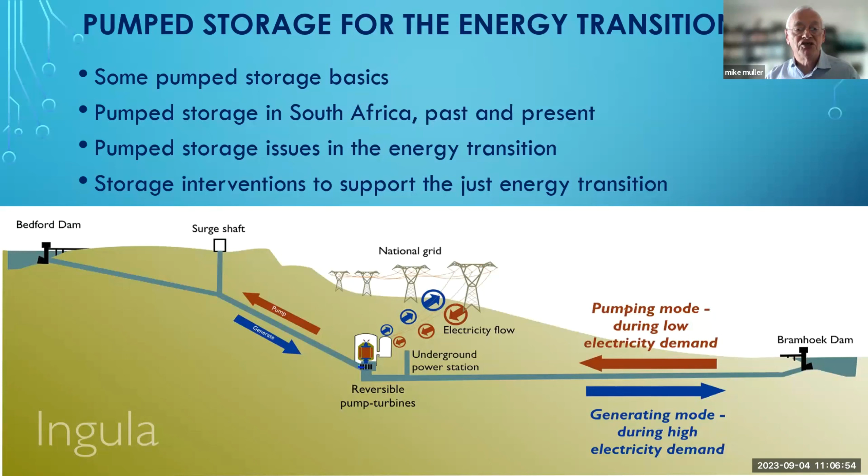4 bullet points for this morning. I'll talk about pumped storage basics. We'll then look at pumped storage in South Africa, past and present, with Mike Shand talking particularly about the Palmiet and Steenbras systems. Then I'll come back and talk about pumped storage in this energy transition and what kind of interventions are needed to support the transition we're going through.

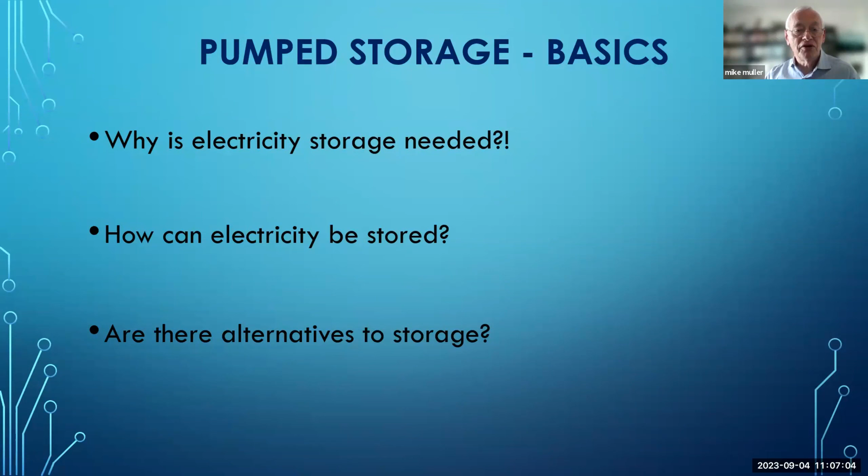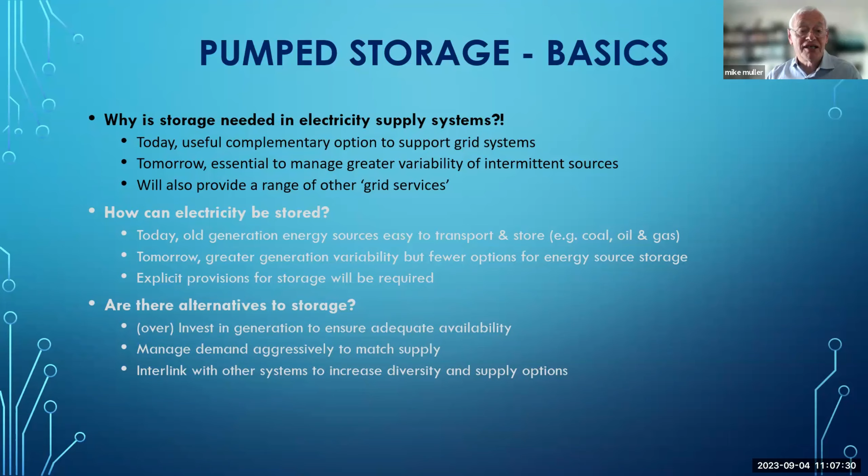So the basics. Why do we need to store electricity? How can it be stored? What are the alternatives? Very quickly, we need storage at the moment as a complementary option. It helps to support grid systems. That's today. Tomorrow, with far more intermittent and non-dispatchable sources, we're going to need it to manage the greater variability of those sources, and we'll depend on it to provide a range of other grid services, which I'll come to. But the basic is clear.

When we don't use much electricity, we use the surplus that comes from whatever generators we have to pump water up a hill. And when we need the power to meet peak demands, we let it out and it runs down and generates for us. Changes with the season, but that's the basic: you use the energy to pump up water when there's a surplus of generation in the system, and when you need extra generation, you let it out and generate power.

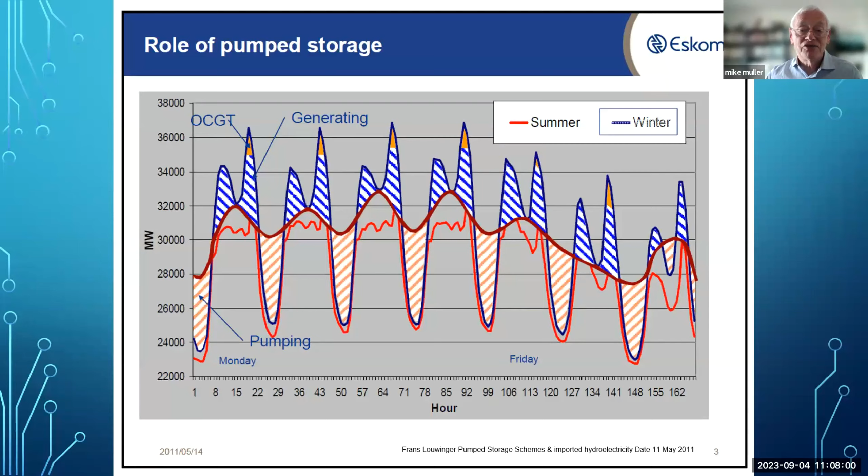And the present role - we can go into great detail - having storage in the system certainly helps to provide for peak supplies. It also helps tremendously to manage variability, because we'll come to the relatively rapid response that pumped storage allows. All hydropower, including pumped storage, can be tremendously helpful if there's a black start crisis - let's hope it never happens - but if you need to restore operations after a really major network outage, having water in a reservoir able to generate electricity is tremendously useful.

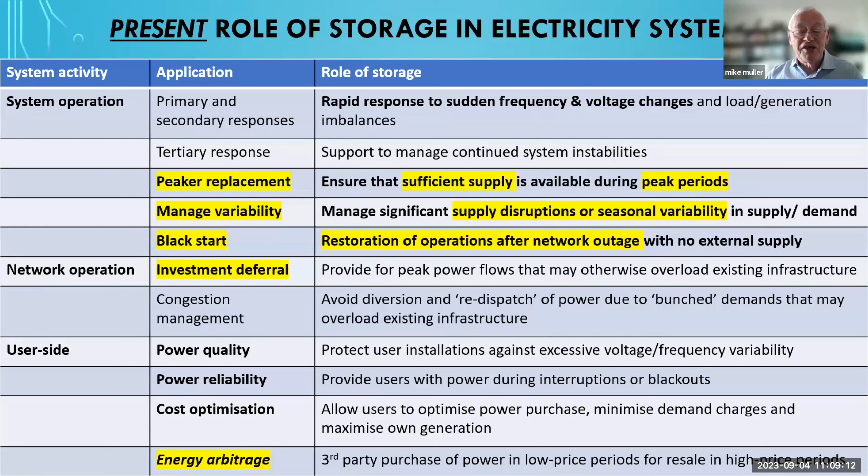And then we need to recognize that just having these peak power flows means we can defer investment in the electricity supply system. The last point I'd like to mention is this idea of energy arbitrage. Storage does help us to smooth out the flow, particularly because third parties can purchase power in low price periods, resell it perhaps in high price periods, which also helps to reduce peak demands.

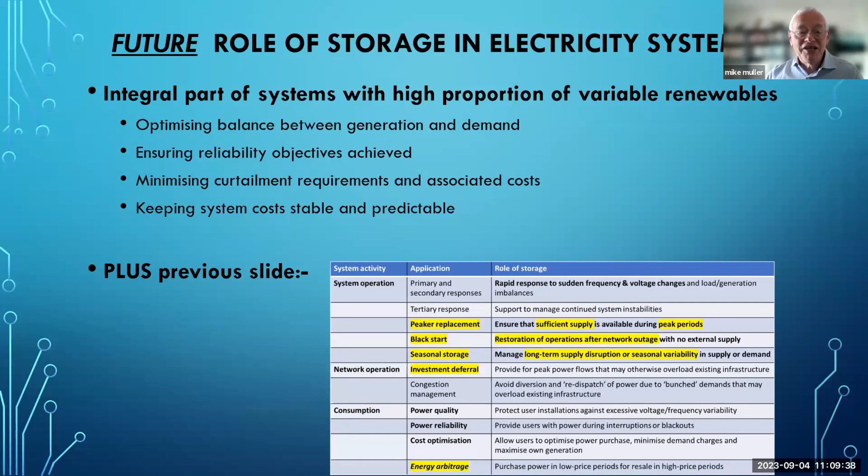And as we move into this sort of future of far more variable renewables, optimizing the balance between generation and demand, achieving real reliability, minimizing the need for curtailment of those renewables - we'll come to that - is important. And part of this is actually just to keep the system costs stable and predictable.

So how can electricity be stored? Today we have to recognize we store most of our energy for electricity, not as electricity - we store it in other ways. But tomorrow, we're not going to be able to do that. We're going to rely much more on system elements. So let me just illustrate this.

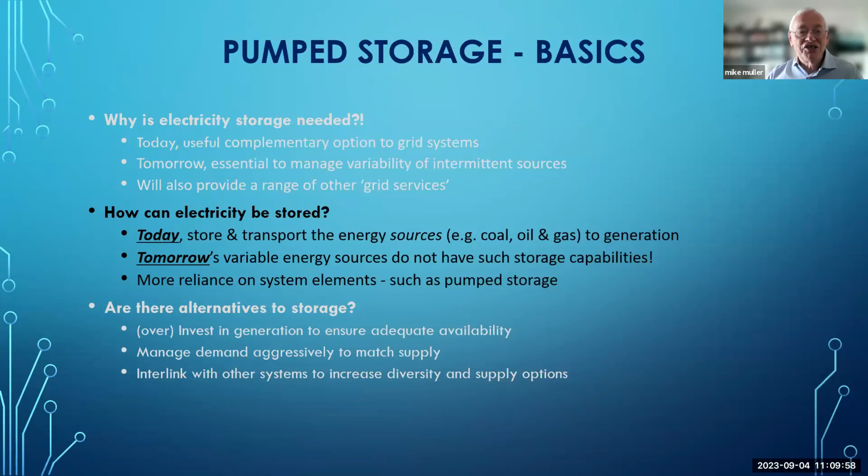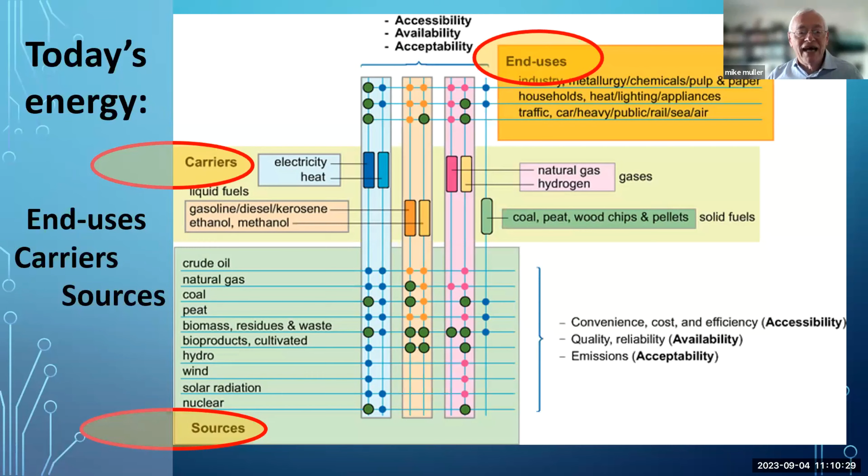We look at the sources of energy for electricity at the moment, and that includes the full range, from oil and gas and coal through to liquid fuels, all that diesel we're burning. And of course, we can also use natural gas and the rest. The carriers of electricity include those liquid fuels, include the gas, include coal, and we use those to get the energy to end users. But this is fine - we don't have an energy storage problem when we can put diesel in tanks, where we can put grain, which could be turned into biofuels, into silos. When we have mountains of coal, when we need to ramp up electricity generation, we just put more coal into the system.

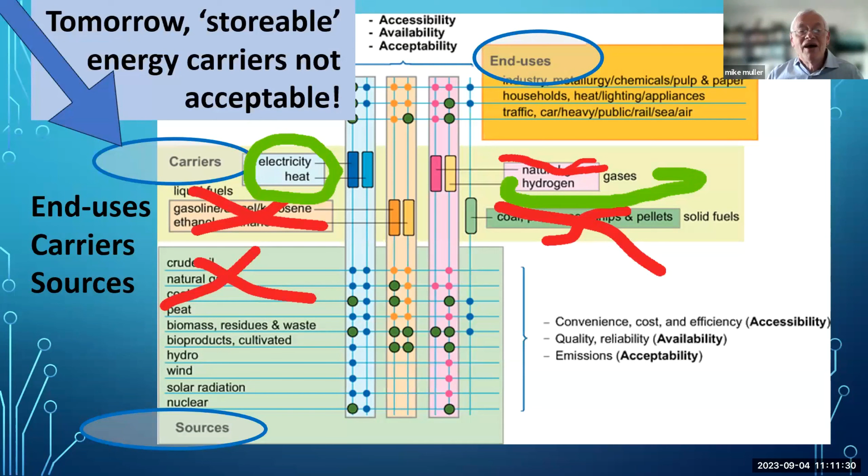But the fact is that those storable energy carriers are not going to be acceptable in the future, in a low carbon future. We're not going to be able to use the carbon-based oil, gas, and coal. We're not going to be able to even use a lot of the biomass unless we're very clever about it. We're going to be restricted in what we can use to produce electricity, and also what we can use to carry it to the end users. And in the long run, electricity is going to be the main carrier, and perhaps, let's see, hydrogen will play a role in the future.

So what are the limits for future electricity storage, and what are the options? Well, we know the options: batteries and all their varieties, including lithium, maybe green energy carriers like hydrogen, biofuels at the moment. The physical mechanisms, compressed air and flywheels, have always been talked about. But when we look at it, pumped storage is the dominant use at utility scale. And that's counting as megawatts, just the power it can generate, rather than total energy, megawatt hours, the amount of energy it can store. Because by megawatt hours, pumped storage really dominates.

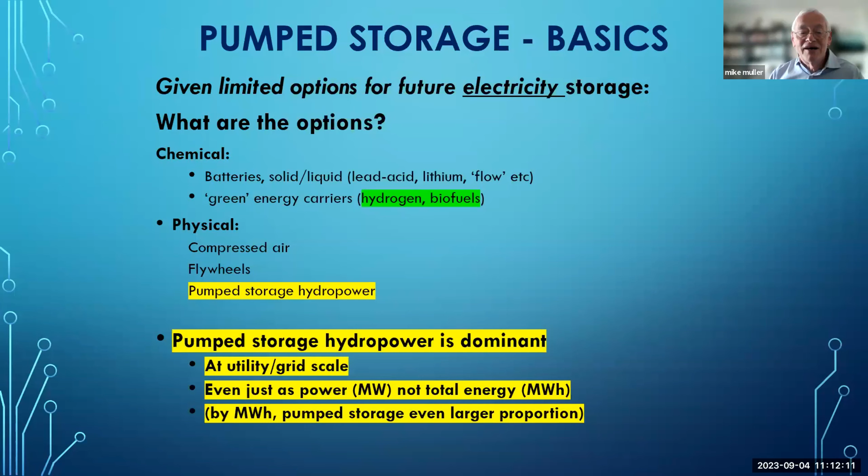If you look at the global numbers, collected by IEA or the US government, you see that pumped storage makes up over 90% of the energy stored in electricity systems worldwide. Back in 2018, that might have shifted 1 or 2% towards lithium, but pumped storage remains absolutely dominant as an electricity storage system.

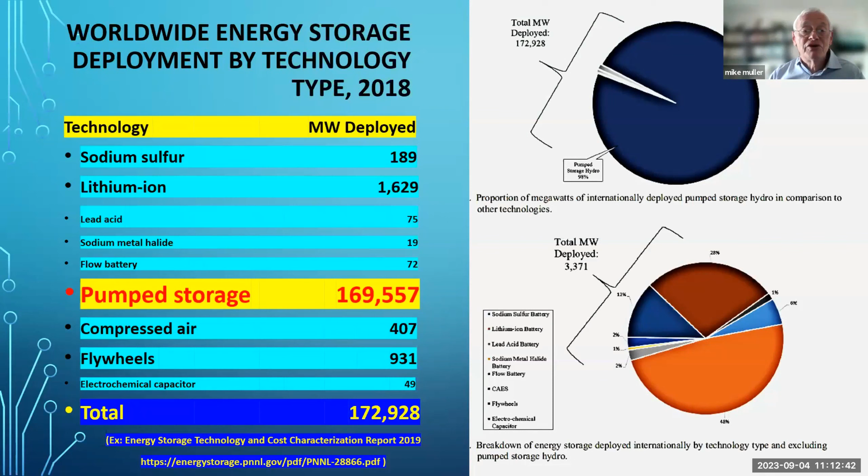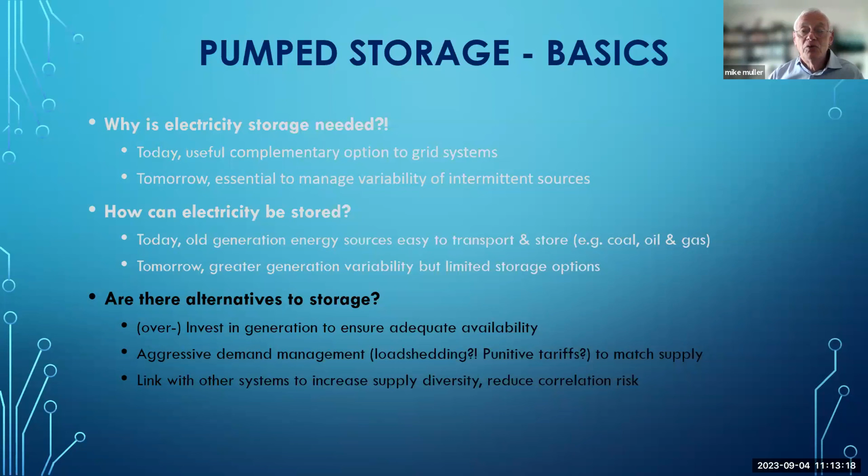Are there alternatives to pumped storage? Yes, of course. We can invest in more generation, just have a lot of generation available at all times, which probably means we overinvest in generation because a lot of it won't be used except in peak times. We can go into aggressive demand management—we're doing that already with load shedding. We can have punitive tariffs to match supply to demand, or we can try and link up with other systems to increase supply diversity. All of those things can be done, but that's not where we are just yet.

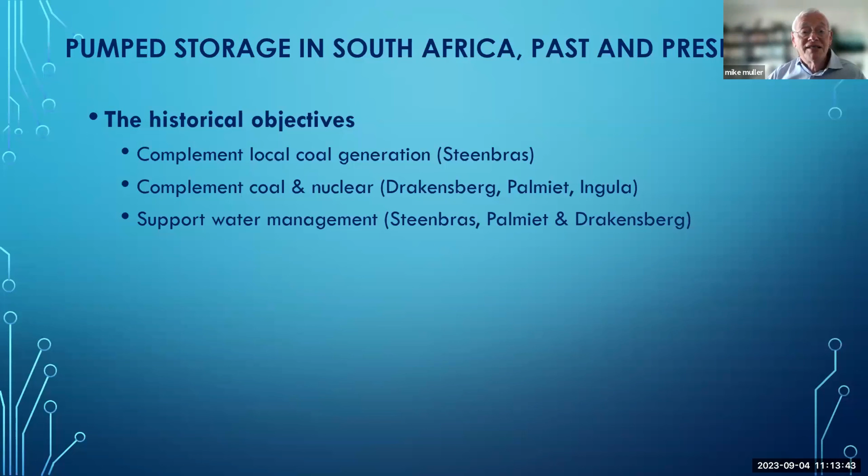So I do need to remind us that we've actually got quite a lot of pumped storage in South Africa. It was set up originally to complement coal generation at Steenbras, and then Drakensberg, Palmiet and Ingula. It was also set up to support water management at Steenbras, Palmiet and Drakensberg—we'll talk about that. In the end, South Africa is already quite well served by pumped storage, with power generation capacity of 3,000 megawatts and total energy stored of over 60,000 megawatt hours, implying about 20 hours of storage at that 3,000 megawatt power, which is not to be sneezed at, but it will not be enough in the future.

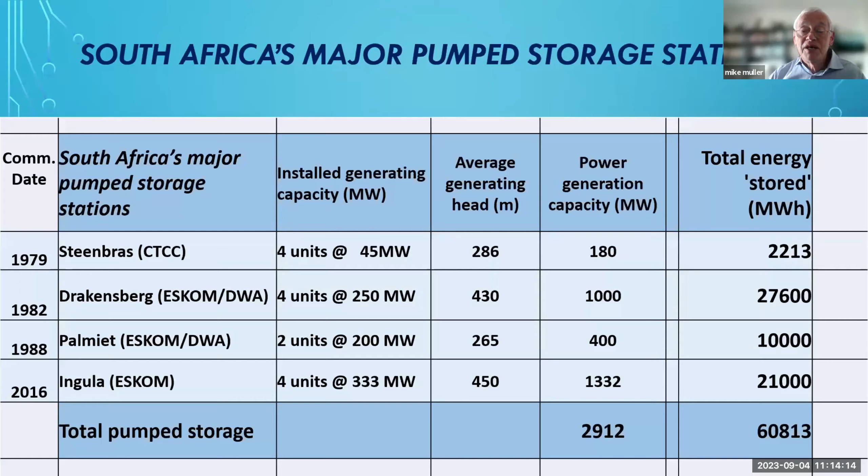So the present status: as we know, the system is in deficit with generation and reliability, huge challenges for system operators, and a growing proportion of intermittent renewables, which is not making life easier. What we're seeing is that pumped storage is already supporting structured supply restrictions, providing flexibility and dispatchability that's critical to fill the gaps.

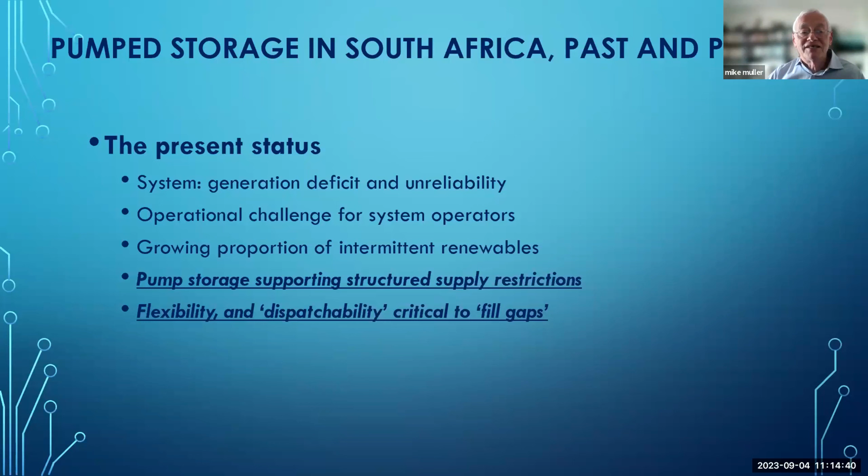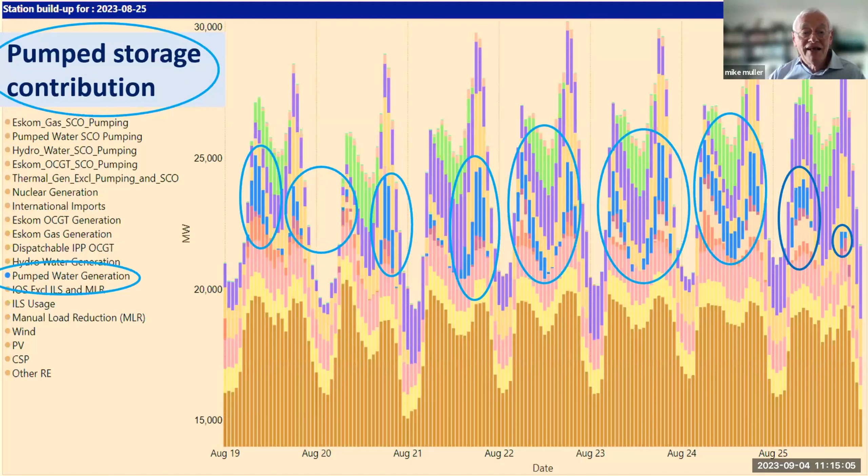So let me now hand over to my fellow colleague, Dr. Mike Shand, who will talk about how Palmiet and Steenbras in the Western Cape are really contributing to this process. Over to you, Mike.

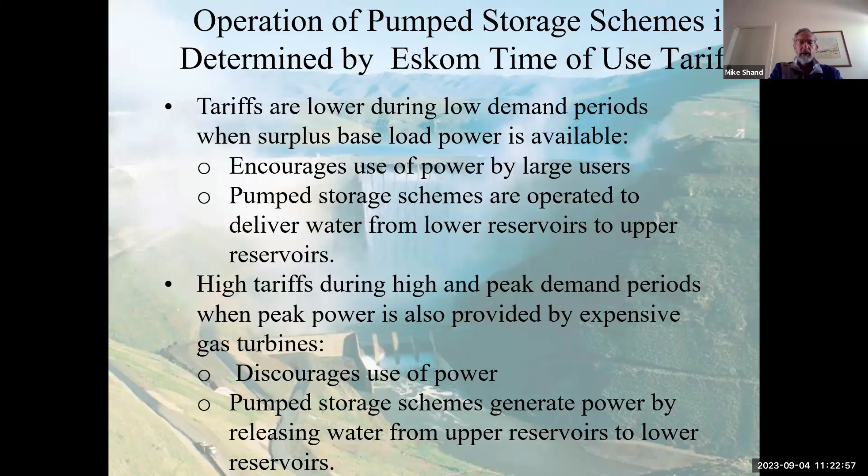For example, peak demand, which is when pump storage is used to generate, is from 7 to 10 in the morning in the low demand season, and from 6 to 8 p.m. on weekdays. I think the high demand season is fairly similar. Next slide, please.

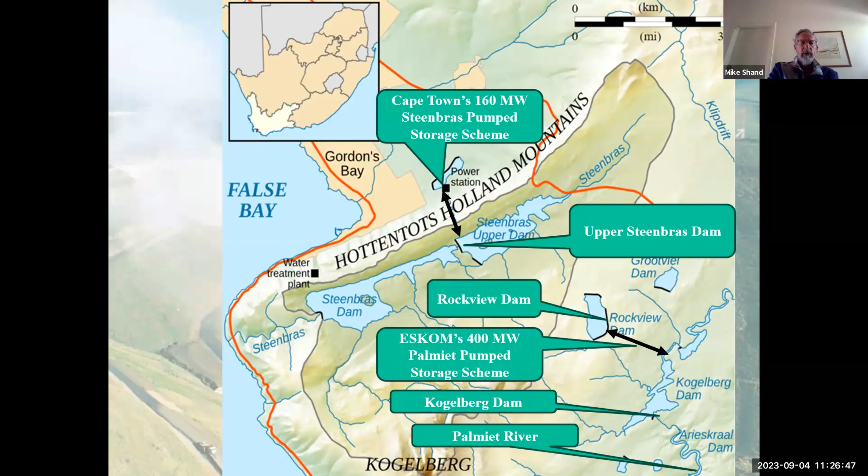Just to show the two pump storage schemes in a Google Earth image and where they are located.

Now to speak about the City of Cape Town Steenbras Pump Storage Scheme.

As I said, the City of Cape Town Pump Storage Scheme comprises the Upper Steenbras Dam, which also supplies water to Cape Town, and then the lower dam of the pump storage scheme, which is just close to Gordons Bay.

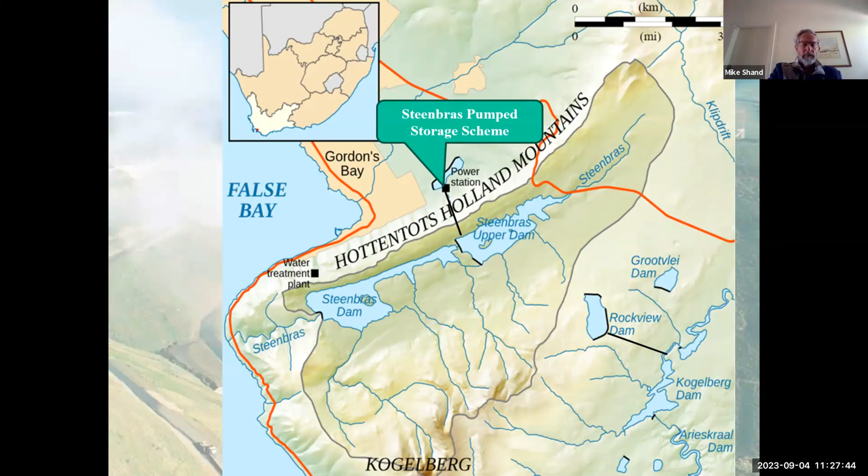This is a 180 megawatt scheme. It comprises 4 by 45 megawatt reversible Kaplan turbines. It was originally operated in conjunction with the city's Athlone power station to supply peak demands.

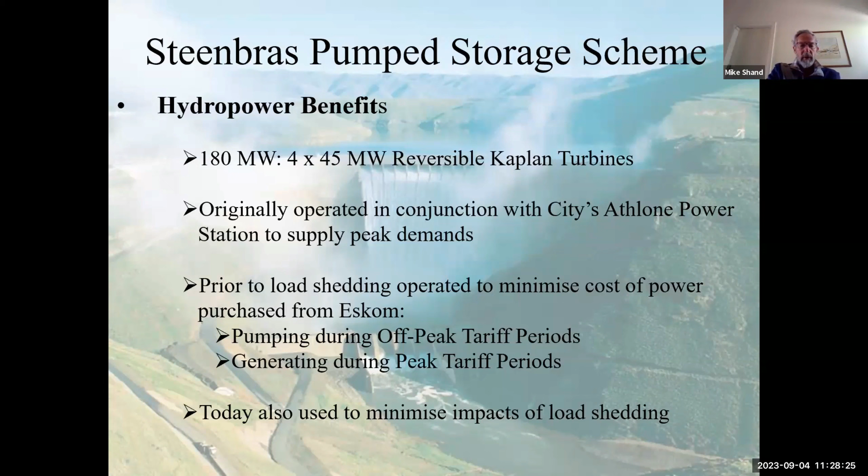Prior to load shedding, it was operated to minimize the cost of power purchased from Eskom, pumping during off-peak tariff periods, which I spoke about earlier, and generating during peak tariff periods. Today, it is also being used to some extent to minimize the impact of load shedding.

It also benefits water supply. The upper dam stores water to augment the supply to Cape Town.

Initially, water for Cape Town was released via the lower Steenbras Dam, which is the first remote water supply for Cape Town, and then treated by the Steenbras water treatment works. Since the Faure water treatment works was commissioned in 1994, water has been pumped by the Firlands pump station from the lower dam of the pump storage scheme to the Faure water treatment works.

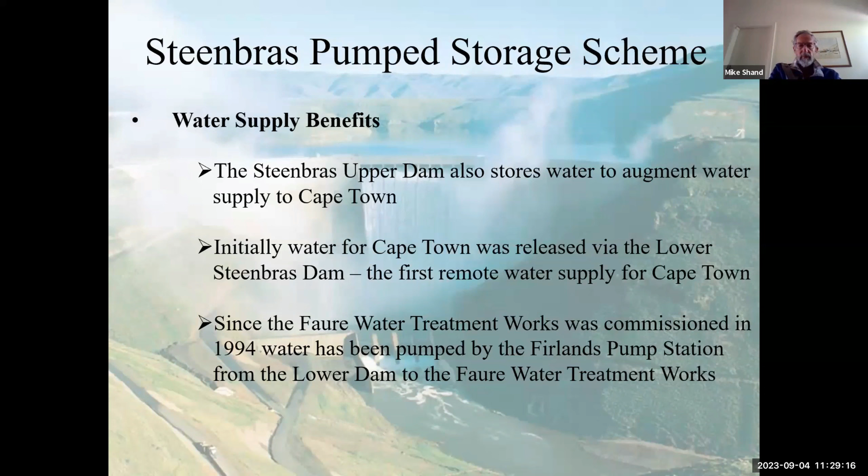This shows a cross-section of the pump storage scheme: the upper reservoir, the low pressure tunnel, the surge shaft, and then the high pressure tunnel and steel conduit and steel penstock, the turbine generators themselves, and the lower reservoir.

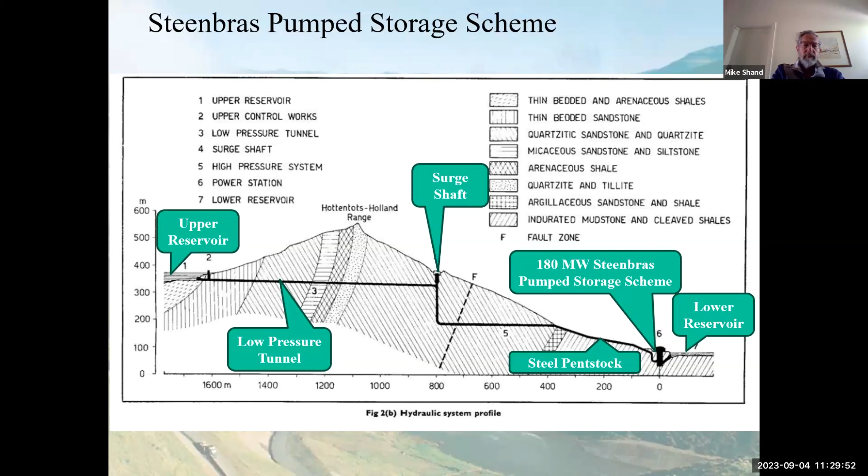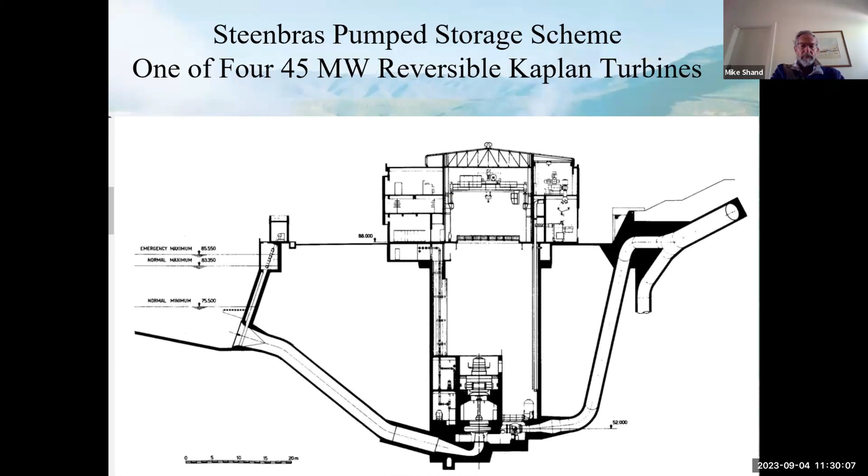Just a view of the power station itself, comprising 4 45 megawatt reversible Kaplan turbines.

Eskom's Palmiet Pump Storage Scheme is linked with the Department of Water Affairs and Sanitation's Kogelberg and Rockview Dam. The scheme's dam components are owned and operated by the Department of Water and Sanitation, and the pump storage scheme by Eskom. The Department of Water and Sanitation requests or advises Eskom when water should be transferred, and Eskom then accommodates that within its operating cycle as best it can.

As I showed earlier, the Palmiet pump storage scheme is on the right, comprising the Kogelberg Dam, Rockview Dam, and the pump storage scheme itself.

Eskom's scheme comprises two 200 megawatt reversible Francis turbines, i.e. a 400 megawatt station. The penstock comprises a concrete lined low pressure tunnel and then the high pressure steel penstock itself, 2 kilometers long.

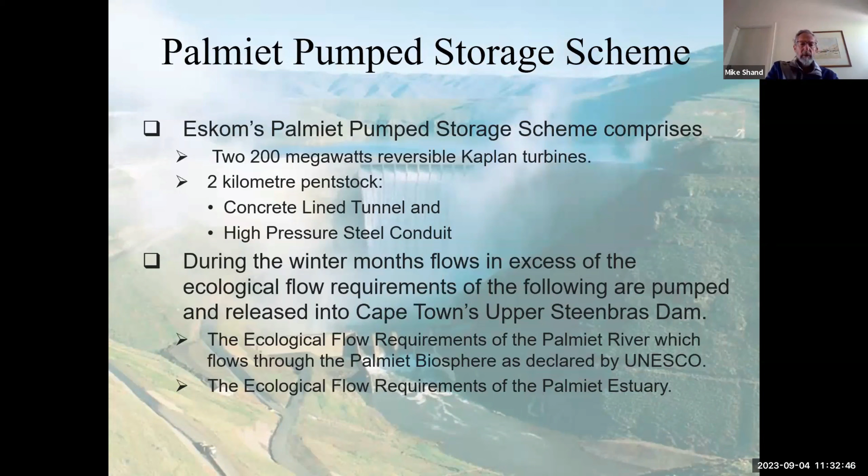Then moving to just the Palmiet pumped storage scheme again.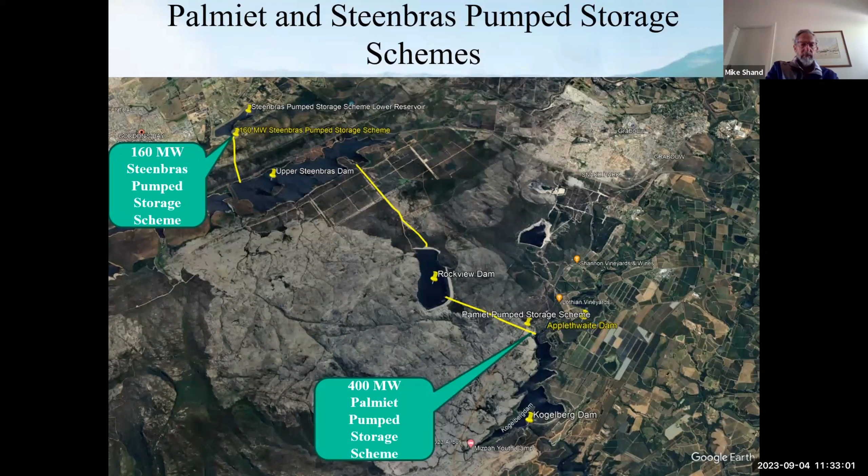Eskom's pump storage scheme was commissioned in 1986. Eskom operates the pump storage scheme in conjunction with the Koeberg nuclear power station and the power transmission from Mpumalanga, to generate during peak demand periods and to pump during the low power demand periods.

And the Department of Water and Sanitation determines when the water should be transferred from the Kogelberg Dam, as I mentioned earlier, which depends on the ecological flows for both the Palmiet River and the estuary.

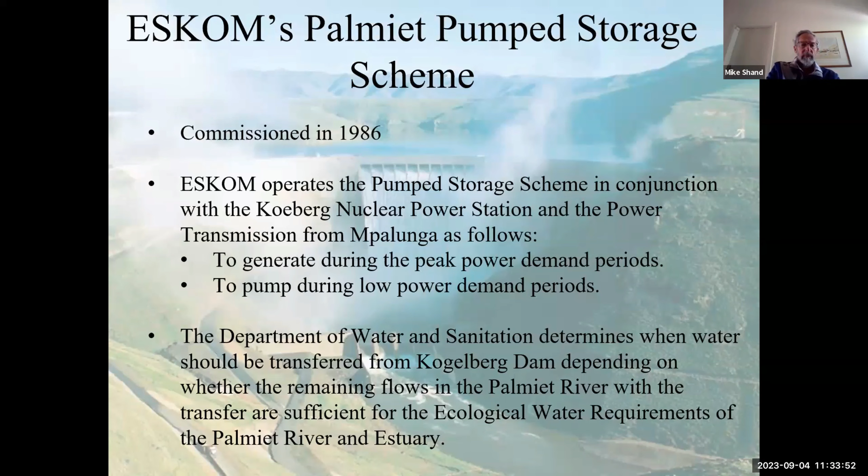Then conclusions. The City of Cape Town's 160 megawatt Steenbras pump storage scheme was commissioned in 1979, that's now 44 years ago. It's normally utilized to minimize the cost of purchasing power from Eskom during peak tariff periods, and it is currently also used to mitigate the impacts of load shedding on Cape Town's users.

Eskom's 400 megawatt Palmiet pump storage was commissioned in 1986, 37 years ago, and is operated in conjunction with Eskom's Koeberg nuclear power station and the electricity transmission from Mpumalanga. It's currently also used to mitigate the impacts of load shedding, and it is also important for supplying water to Cape Town by transferring water from the Palmiet River to the city's Upper Steenbras Dam.

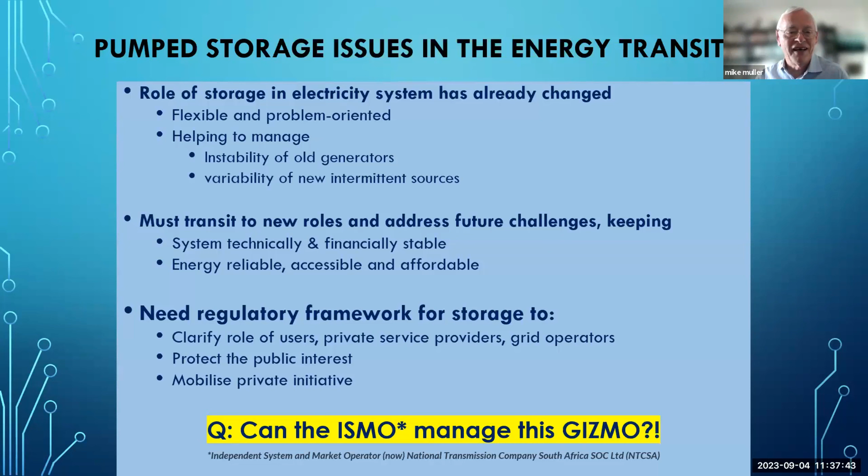And as part of this, we're going to need a regulatory framework for energy storage, which clarifies everybody's roles, the roles of energy users, private service providers, as well as the grid operators, protecting the public interest and mobilizing the private initiative. And I confess, when I remembered about what the ISMO was, I looked at all this list of things that have to happen, and I was wondering, can the ISMO really manage this big gizmo, the Independent System and Market Operator, which I believe is now going to be called the National Transmission Company of South Africa? I much preferred ISMO because it rhymes with gizmo.

The questions we need to ask: why do we need more storage? And if we need it, what kind? Who's going to pay? And who's going to pay how much? And who's going to do what in the new system? This is still open territory. And we look forward to IRP 2023 and see whether it begins to give some answers.

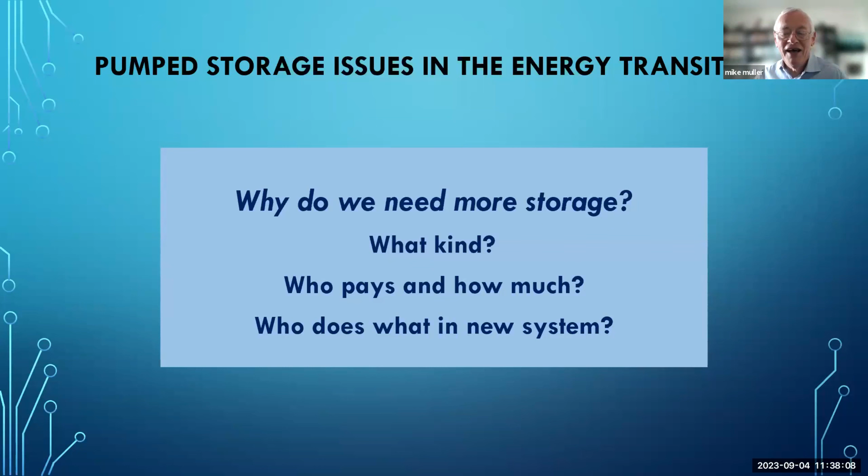And the need for more electricity storage is very, very obvious. As you get into more and more intensive or large-scale renewable-driven systems, you need more storage to manage their variability. And the current experience provides some insight into these challenges.

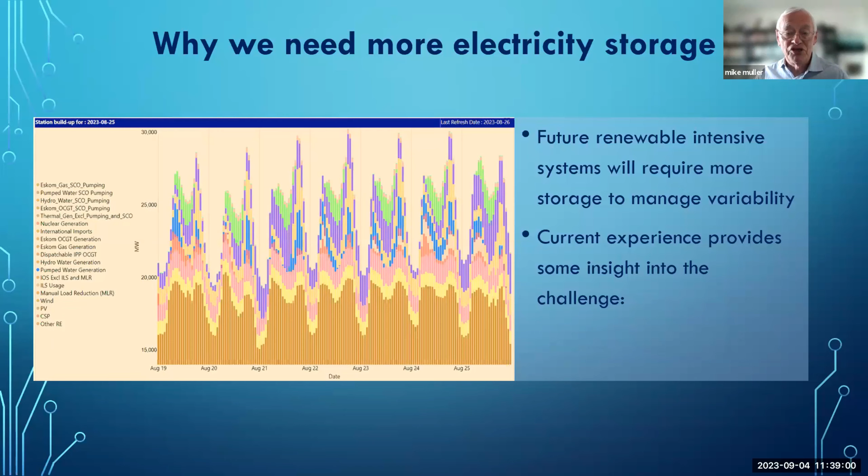Looking at the graph of how the peak, the top of the load is currently being built up. The brown is the coal, and above that is the nuclear, and then the imported hydro, and then you get into the pumped storage and the gas and the renewables. And that mixture is going to be what we have to sustain, and pumped storage or some form of electricity storage is going to play a useful part in that.

And as I say, at the moment, the renewables and storage are just the icing on the cake. Imagine, and I'm not saying it's going to look like this, but imagine a renewable heavy future where that current top slice of the cake is now the whole cake. And now we have to regulate the supply coming from all of these different sources. And if we think that we can do that without storage, we're probably dreaming.

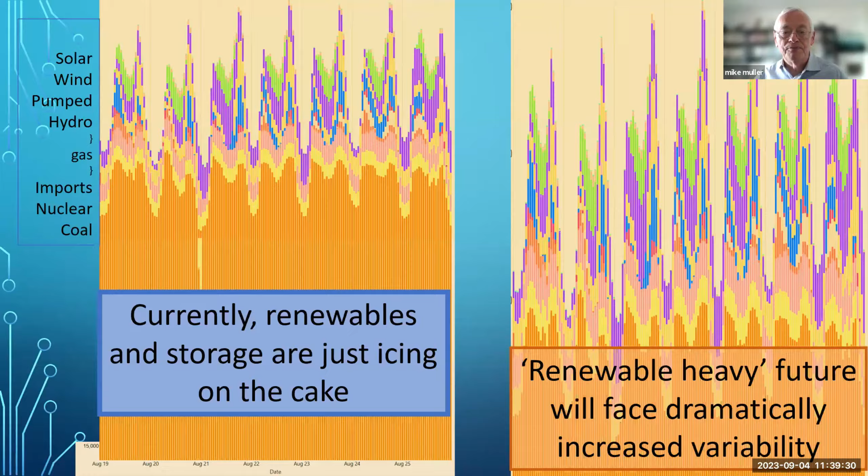So we need to ask the question, what kind of storage will be needed? We mustn't make the mistake of thinking that energy storage is only going to happen at the grid scale. Of course, we won't make that mistake because so many people are now worried about how they can assure their electricity supply. Very often we have to go and buy a battery to be charged by a solar panel, and it costs a lot of money. But there's a portfolio of technologies that's going to be required, for different purposes at different scales for different players.

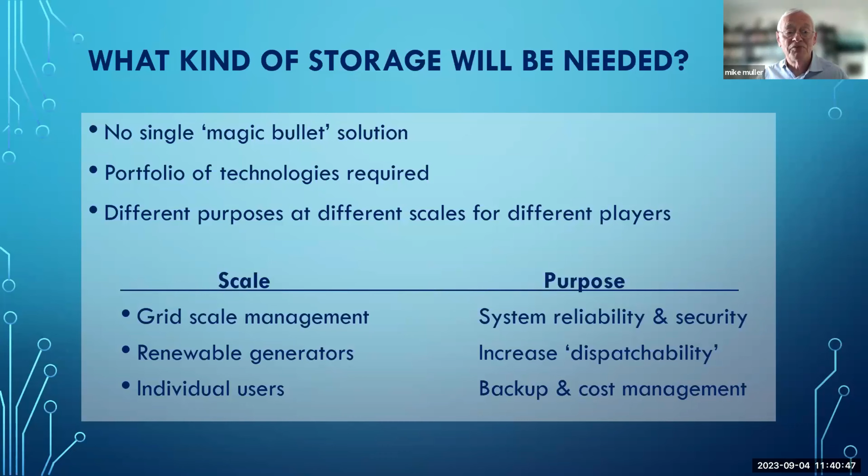At grid scale, we really need storage to provide system reliability and security. The actors providing renewable energy need some way of increasing the dispatchability of that energy, because if they can produce it when it's needed, as opposed to when the sun shines, they can sell it for a lot more money. Then individual users are trying to back up against an unreliable power system while managing costs. So different parties have different purposes and objectives, and they'll use different technologies for those.

When choosing the technology for these different kinds of storage, it must be fit for purpose and cost efficient. Here we're talking mainly about utility scale, but peak shifting is important, managing daily and weekly variability, meeting particular needs of users, and also looking at other grid services, keeping the grid stable. Fundamentally, because this is South Africa in 2023, we really have to look carefully at the broader development objectives the country is trying to achieve, and ask how this storage solution helps achieve those objectives.

If we're going to contribute to just energy transition objectives - this is all political stuff now - we really need to do social and economic assessments of each technology, do the financial analysis, work out what kind of financial and regulatory instruments are needed, and then we can begin to provide resilience to make sure the system can deal with all the unpredictable stresses it might find.

The headline finding from most of the literature is that lithium-ion batteries at grid utility scale - somebody asked what BESS stands for, battery energy storage system, I can never remember - certainly lithium for short-term storage is currently looking like the dominant storage system for utilities. Pumped storage, on the other hand, is way in the lead for anything that requires longer duration than 4 hours. But let's look into that a bit further.

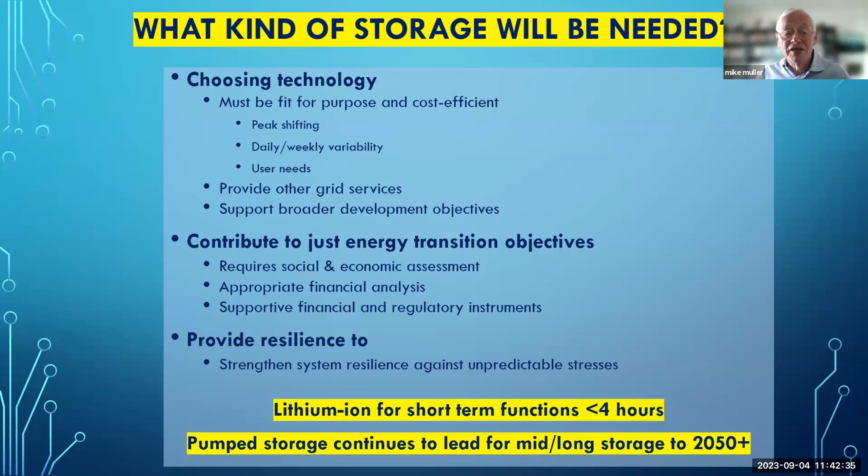Yes, maybe hydrogen will come in - and the green is compressed air, which is interesting. In the longer term, 2040, which is how they're looking at deciding what will be used in 2050, hydrogen could well come in, and lithium could become better in the shorter term. But that's just looking at the cost of storage, not all the other associated costs and benefits of a technology choice.

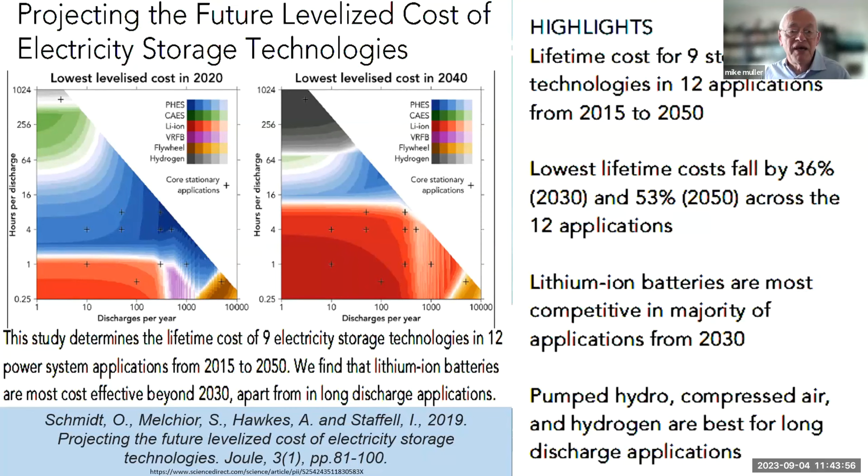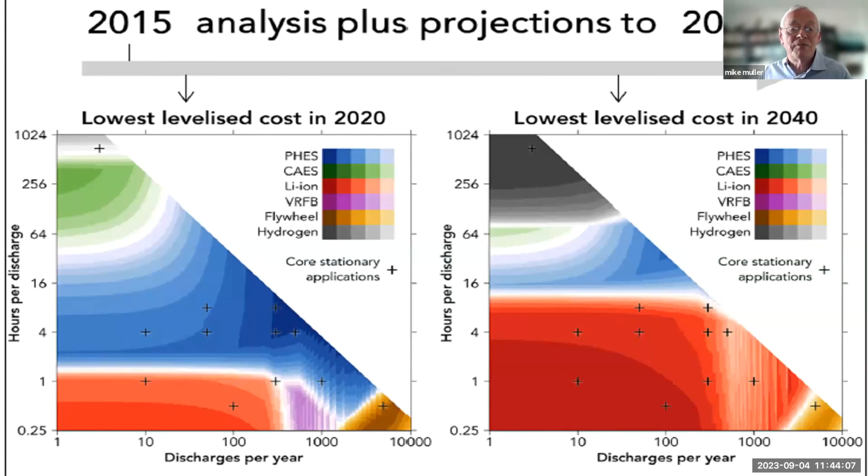Showing you this again in greater detail - I believe the slides will be available, and the references, I've tried to put the key references into the presentation, so you'll be able to see them when you need to. I do need to say that there are other perspectives, and there are some people who say at the moment that lithium-based storage, the 2 hour storage, really doesn't justify its costs in terms of making large-scale deployment.

I think there's people already proving that wrong and making money out of it, but it is interesting that the US Argonne National Laboratory said storage resources with 10 hours storage capacity are delivering value already consistent with the cost of pumped hydro storage. But they emphasize storage isn't needed if you've got a diverse mix of flexible low carbon power sources, and that could include flexible nuclear power.

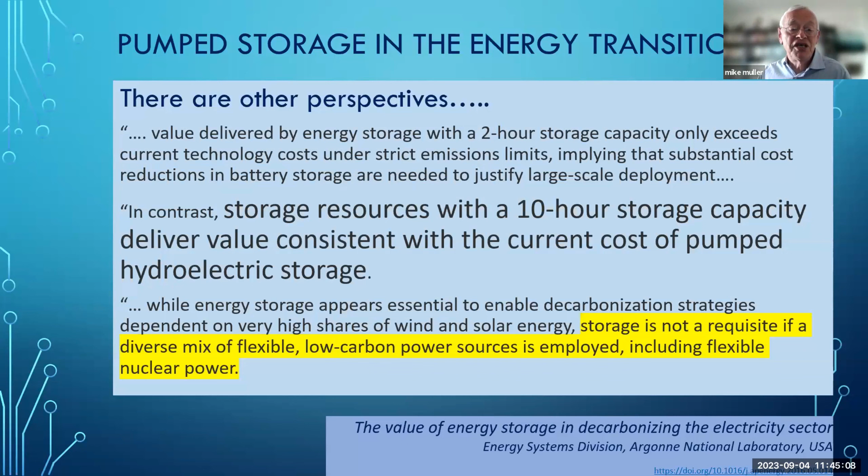I notice they don't mention traditional hydropower, which is actually the way that most countries which are already well advanced down the renewable path have actually achieved storage and stability of supply in a green fashion.

This is why one needs to talk about what else pumped storage can do other than generate reasonably cheaply, having stored energy reasonably efficiently. It can respond rapidly, help regulate voltage and frequency in grid systems. The black start capability is critical, and because it's a longer duration type of storage, it is resilient to HILP challenges - high impact, low probability challenges - the kind of things that can close down a grid if you don't have some system in place to avoid that.

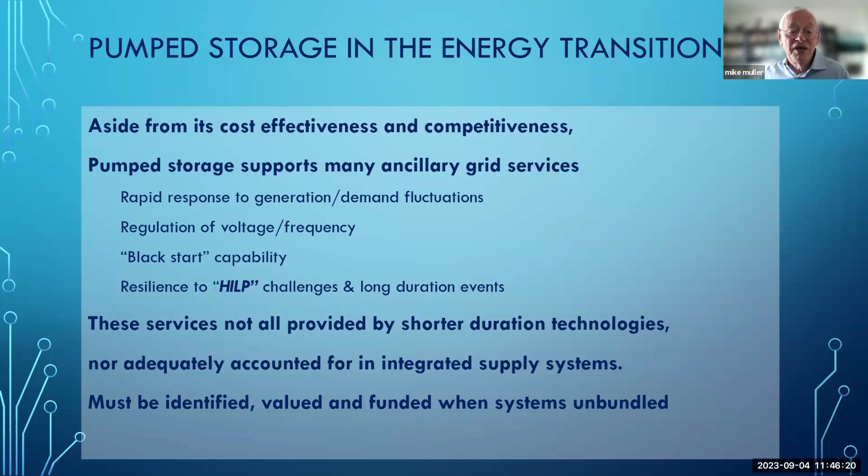These are services that are not all provided by the shorter duration technologies, and they're certainly not adequately accounted for in the integrated supply systems of organizations like Eskom, which simply puts in all of these functions and doesn't necessarily identify value and fund them separately. But we're going to have to do that because we're unbundling the system, and now all of the components of that system have to be identified, valued, and somebody's got to pay for them.

So who's going to pay and how much? We better just recognize that society and the users are going to carry the costs, which is why it's so important for us to get the technology choice right.

The challenge is to ensure that we get a cost-effective system for all users. We've got to have a fair allocation of costs between users. Users have got to be protected from unpredictable price variations. All of those ancillary grid functions have got to be supported somehow. And we've got to remember that there are wider social and economic benefits involved when you start building an entire country's energy system again. What is that going to mean for the country and its economy and its people?

That's why we have to recognize that the value of electricity changes all through the day. In some automated markets, the value of electricity, the price that you have to pay for a certain amount of electricity, varies literally minute by minute.

At the moment, there's a bit of a gold rush for energy arbitrage - what can we do to buy when it's cheap and plentiful and sell when the demand grows or the supply falls? A number of not just companies, but countries - the Norwegians are laughing at the moment because they're well connected to the European market. They have a lot of hydropower available. When Europe goes dark, the Norwegians open the taps and the water goes one way and the dollars and euros come back the other.

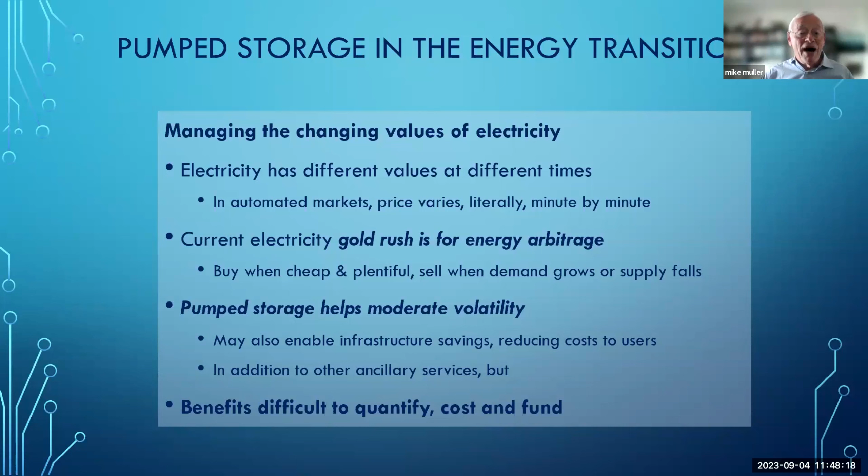What we find with pump storage is it helps to moderate the volatility, which might be bad news for the arbitrageurs, but is good news for the rest of the public, because it can enable infrastructure savings, it can reduce costs to users, as well as all the other ancillary services that it provides. But it is very difficult to quantify and cost and fund these benefits.

Just a couple of pictures, just to show how electricity prices, even in a well-developed market like Germany, vary through the day and then vary hour by hour. You can see there's money to be made if the cost of your energy varies from €0 per megawatt hour on a Sunday and goes up to 60 euros per megawatt hour by Tuesday.

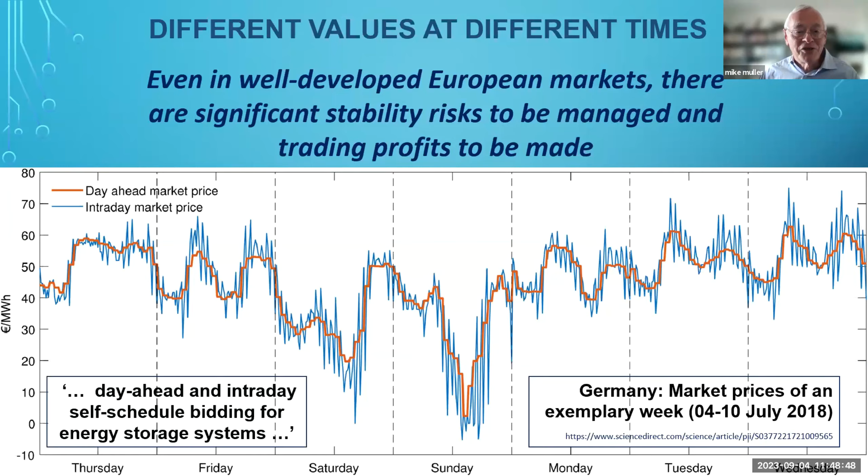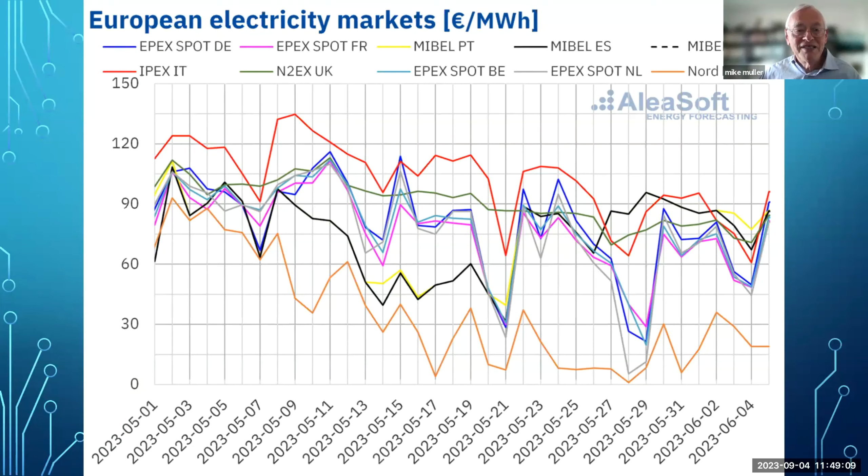And this question of the high impact, low probability events - yes, we don't expect them, but boy, when they happen, do they cause havoc? This is what happened when the Ukraine war started, and you saw the European electricity markets go up 5 times in price - not 5%, but 5 times the price - over a couple of months, just because a small war started and a gas supply was interrupted.

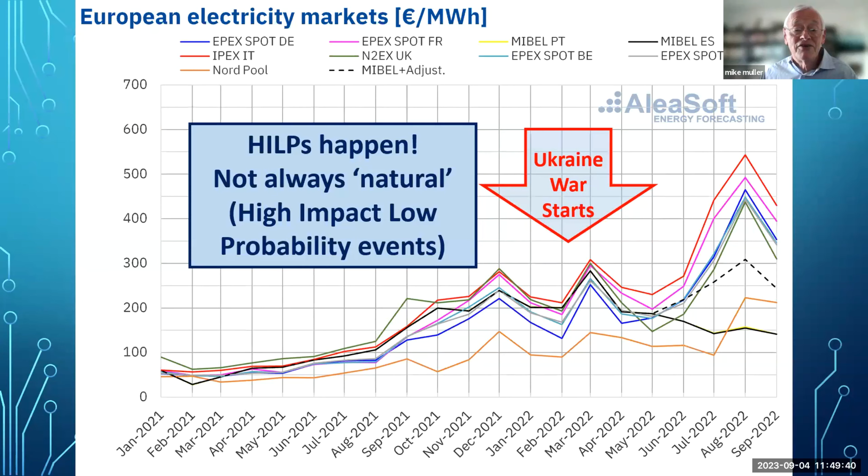Keeps coming back to the story: how do we value pumped storage properly?

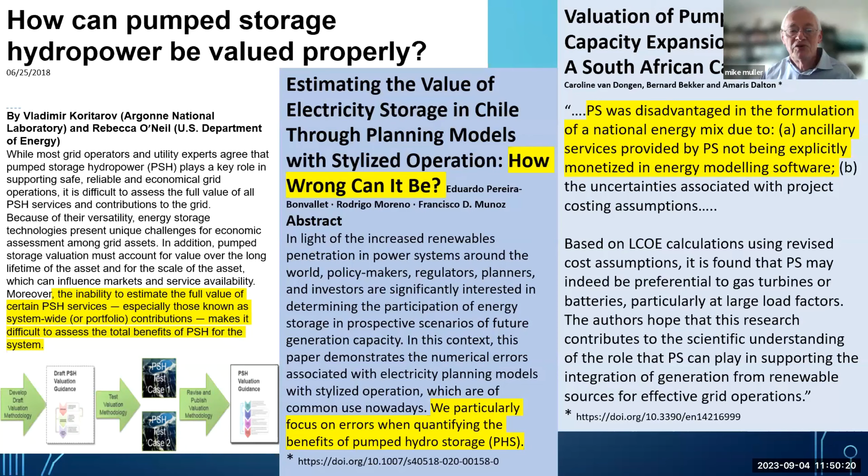Whether it's the US Department of Energy saying it's difficult to do, it hasn't been done very well, or the Chileans, who are very good at this, saying how wrong can these planning models be to get it so badly wrong. And Caroline van Dongen and her colleagues down in Stellenbosch saying that the way the modeling was done here in South Africa, public pump storage was disadvantaged because it wasn't properly monetized and recognized in the software used to do the modeling. So it's a difficult business.

It's made more difficult because we don't know what the institutional arrangements are going to look like, or know what they're supposed to look like, but will they function as well as they should? We know Eskom is going to retain a big role as a generator, but there are a lot of private generators who are going to come in and aim to increase the value of their output. And us as electricity users, whether individuals or institutions, are going to have to adapt and adopt new approaches.

And here comes the challenge again. Can this Independent System and Market Operator manage this complex organization? And can NERSA really nurture the necessary new arrangements? The most critical thing is who's going to ensure that in this complicated process, these complicated institutions we've set up, just transition benefits are achieved.

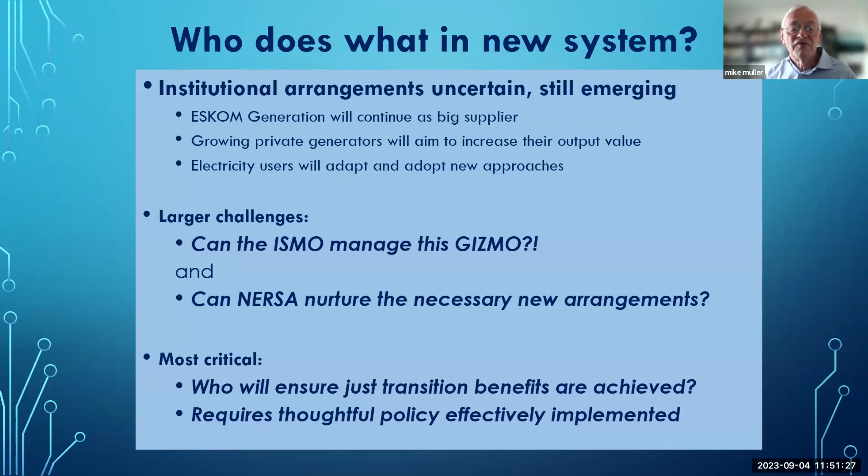We really need thoughtful policy, effectively implemented. And actually, you don't hear too much of that in the political discussion at the moment. It's one of the reasons for having this workshop. Who's going to be doing what?

Storage needs to be regulated to protect system benefits, allocate risks and remedies, and particularly to balance the trading benefits that private providers are going to gain with the system resilience objectives that the public wants and needs. And then we have to consider who's going to take decisions on the impact of our choices of energy storage on the local just transition.

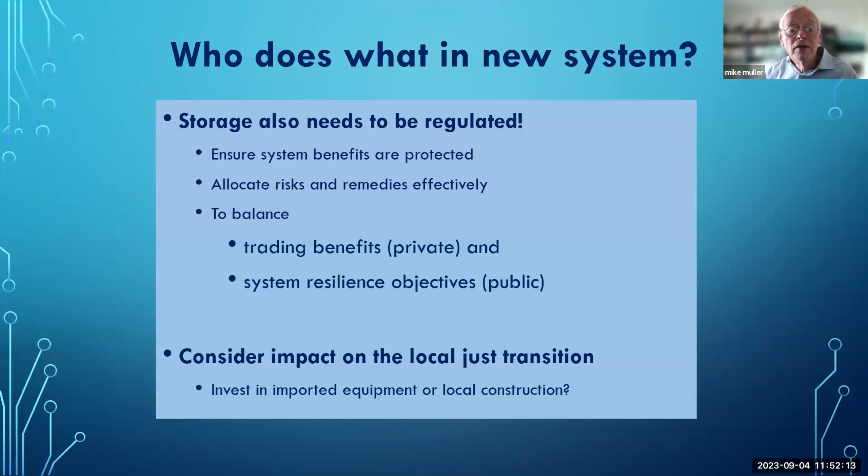For example, are we going to invest in imported equipment, the batteries, the panels, and the rest of it, or are we going to turn to local construction? Here we need to recognize that if we want to go the local route, we have rather a lot of potential pumped storage sites in South Africa.

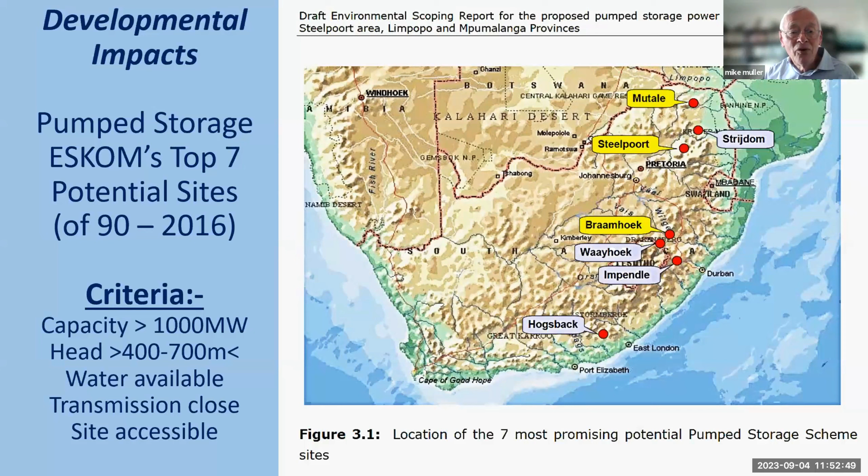Back in the day, Eskom had identified 90 potential sites. They filtered out a bunch of them and looked at the top 7. Braamhoek, which is now called Ingula, has been built, but a couple of others are there and certainly could be developed when and if we want them. Question is, will we do so? And then you look at the criteria that were used to identify these.

Is there water available? Funnily enough, Ingula Braamhoek was the one where the water was potentially most problematic. They've resolved it. There's siltation risks. Steelpoort, which is up where the De Hoop Dam is on the Olifants River system, was identified as being very serious as a siltation risk. But since we've built the dam, which was subsequent to this review, the siltation risk's been reduced.

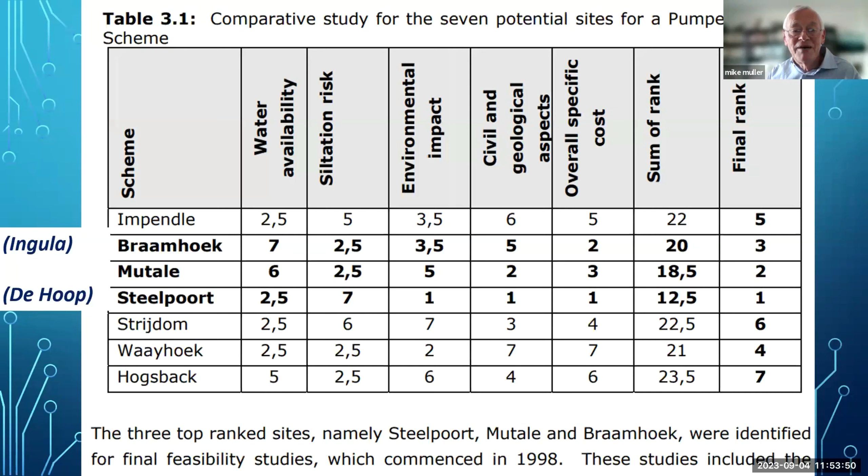And it's interesting that Steelpoort, I mention this because it's coming through as a very strong option for the next pumped storage system in South Africa. I forget what it's called again, and Pat Naidoo will remind me in a moment. But it scored very highly, yet in the end Ingula Braamhoek was chosen, for a variety of reasons. It just goes to show, just because something comes up as the best possible technical system doesn't mean to say it's the right one to proceed with.

But when we compare pumped storage with the alternatives, batteries and inverters, I was horrified to see the figures that came out recently - I've put the source down below - that in the 3 months, April to June, South Africa spent 16 billion rand importing batteries. And that's in addition to about 15 billion importing panels and inverters. Now, that's an awful lot of money for the country to send out and not do anything locally except put them on roofs and generate some electricity.

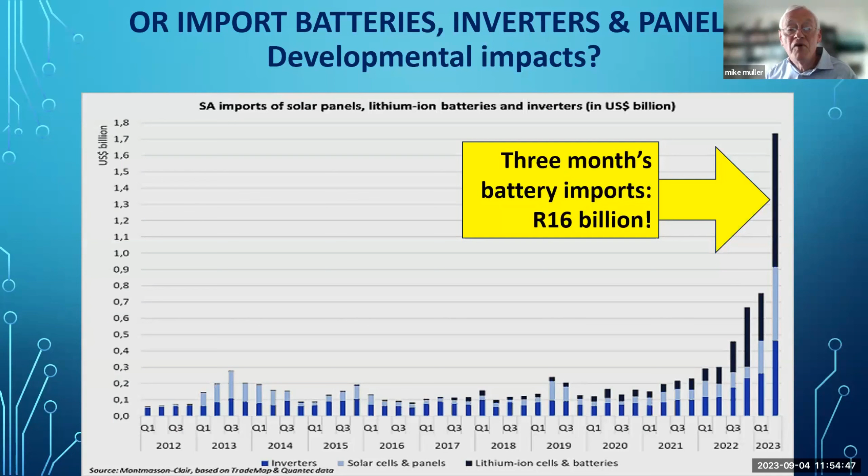And that essentially is the choice. We're going to have to choose between pumped storage, at least more pumped storage, and batteries, or at least not quite using batteries for everything. That's probably the big developmental choice that has to be made. It's difficult to make these choices.

And everyone who looks in this domain - I've been doing quite a lot of work trying to understand how different countries are handling this - people are saying things. I love the Swiss: uncertainty will be certain. We know it's going to be difficult to make decisions, particularly long-term decisions like building pumped storage, because those kinds of investments take a long time, have high capital costs, long construction, and require a long payback period.

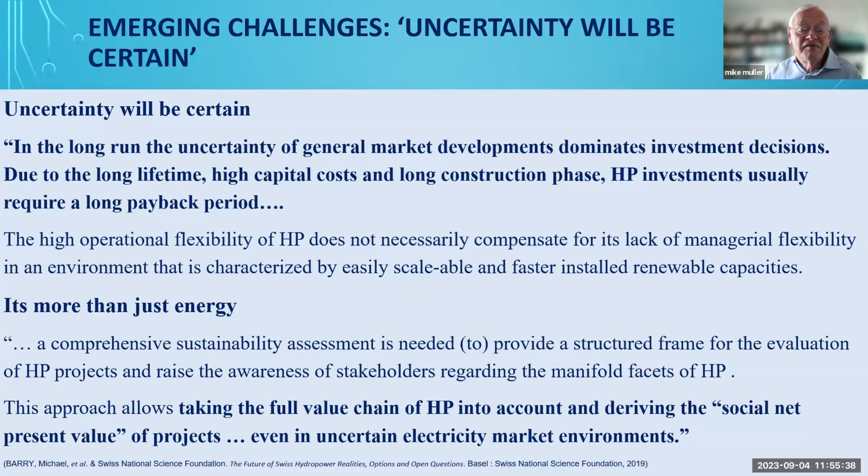But it's not just about energy. We've got to look at what they call the social net present value of projects. How do we assess the benefit for the wider society of one set of energy storage technologies against another? That's the challenge we'll face: what kind of storage are we going to adopt, who's going to pay for which bits of it, and what criteria will we use to decide what kind of storage we want in our future energy system? That involves looking at local content and its benefits versus imports, and particularly the development impact of the storage option chosen at different investment locations.

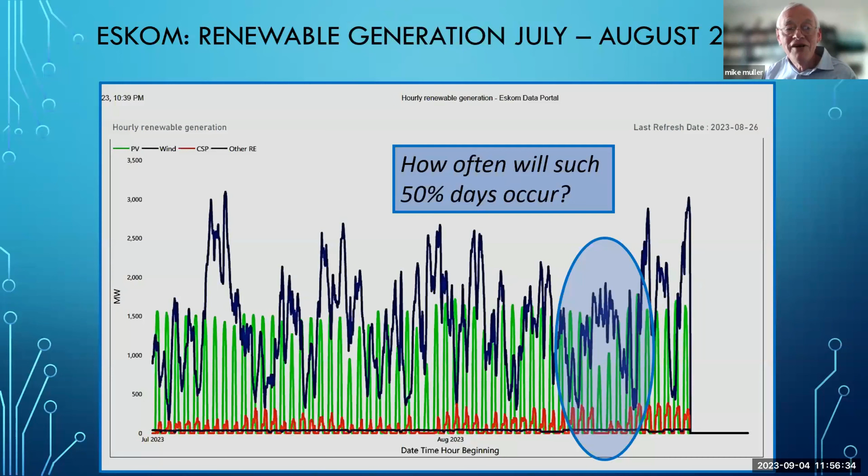We do need to remember this is going to have to happen quite often. It's been a relatively stable winter, but it was interesting: there was a 4-day period of very cloudy, very still weather where the renewable energy system Eskom currently has in place saw its production drop by 50%. Too many of those 50% drops without enough storage really threatens the stability of the system and our ability to keep our economy working the way we'd like.

So the key message, as I draw to a conclusion: it's very tempting to just say, well, put in a few more batteries every time you put in a few more wind turbines, and we'll incrementally increase storage as we increase generation. The problem is those batteries cost a lot more per unit of energy stored than pumped storage. So we're placing a burden on the public sector, and we might be crowding out local economic opportunity by doing the quick and easy incremental buying of batteries instead of building system storage in the country.

Obviously, smaller interventions are attractive for private funders. The unit cost looks good, you're going to get a return quite quickly, especially while the system's unstable. You're going to be able to make some money buying cheap and selling expensive, but the overall system-wide cost will be higher. There'll be limited domestic economic spin-off, and you'll crowd out the larger strategic HP interventions, which will then become more expensive and less viable in future because a lot of storage will already be in place.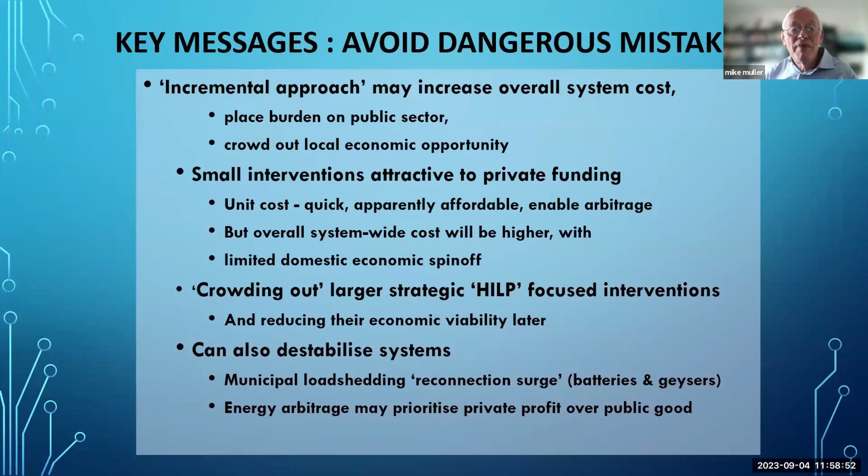These are the kinds of things we need to regulate and think hard about how to manage. So the key message is maybe start now. We've first got to recognize that storage is going to become very important as the transition to renewables, with their intermittent and variable nature, proceeds. Certainly the storage must be in place as we expand solar and wind. And we must recognize the value of the other services it supplies, the security it offers, to have more storage and longer-term storage rather than just the minimum short-term peak shifting storage.

But we need the framework to fund and regulate this accordingly. So we need to choose the right technology in the right place for the right purpose. And it looks like the optimum is, yes, we'll carry on importing batteries for short-term load shifting, even if we're importing them and getting very little local benefit from them. But for anything that requires long duration storage, and that includes system stability, we really do need to think about pumped storage.

Trouble is, pumped storage takes time. We need to plan, we need to implement, and we need to commission. And if we don't start now, we'll find yet again, as has just happened with transmission - oh, we can't build more wind turbines because we forgot we're going to need grid connections - we'll find we can't use as much energy as we should through solar and wind because we haven't got the storage to back them up in place in time. So the message is we really have to start now taking decisions about system storage, and it's just as serious as how we generate and how we transmit the energy.

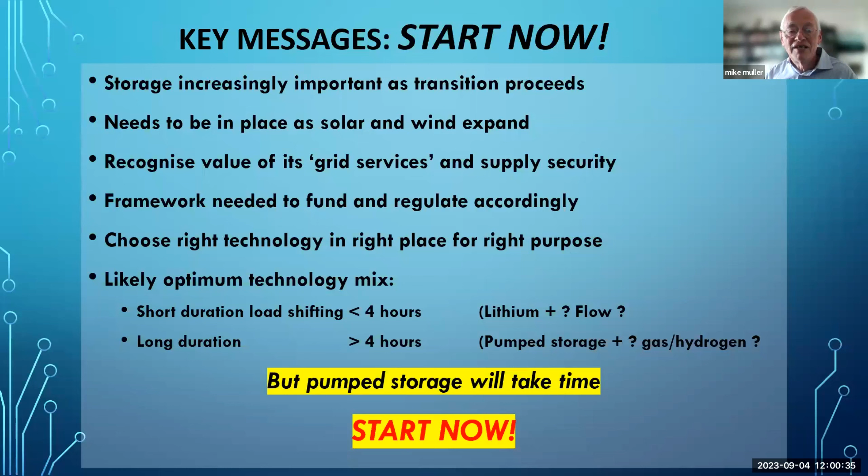So I hope that's a helpful start to the discussion, and I hope we've got enough time to have some discussion.